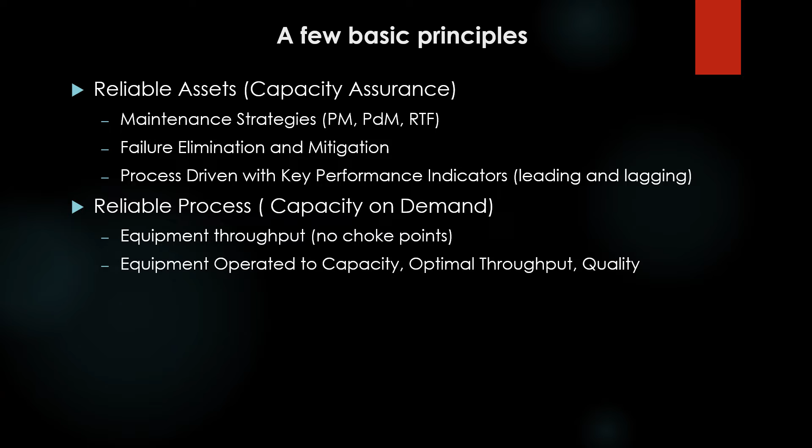The reliable process, capacity on demand, equipment throughput, no choke points, equipment operated to capacity, optimal throughput and quality. Process driven with key performance indicators again. We're leading and lagging. So reliable assets, reliable process. Reliable assets plus reliable process gives you certain results, okay? Meeting customer demand and profit.

The reliable assets, capacity assurance, capacity on demand. The goal, this goal will never be reached without a true partnership. We can't reach this goal by meeting capacity on demand and capacity assurance without having true partnership. Partnership with production, maintenance, and operations, storeroom, and so on.

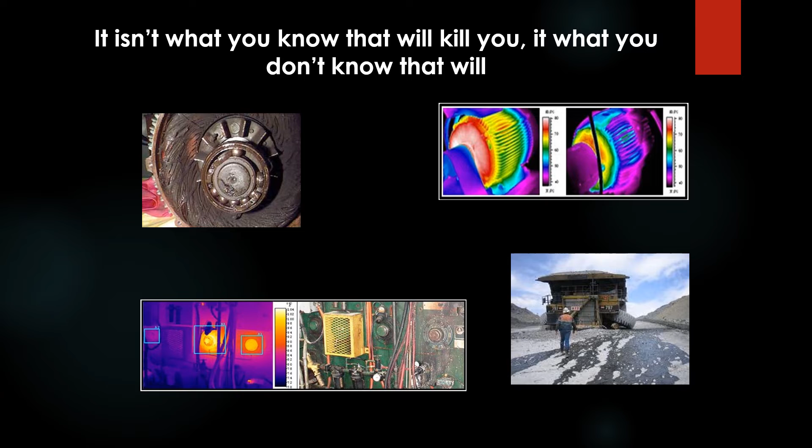I don't know if you've ever seen this before, but it says it isn't what you know that will kill you, it's what you don't know that will. And these are actual pictures that I took in organizations. And then your system is perfectly designed to give you the results you get. That's from Dr. Deming, smart guy.

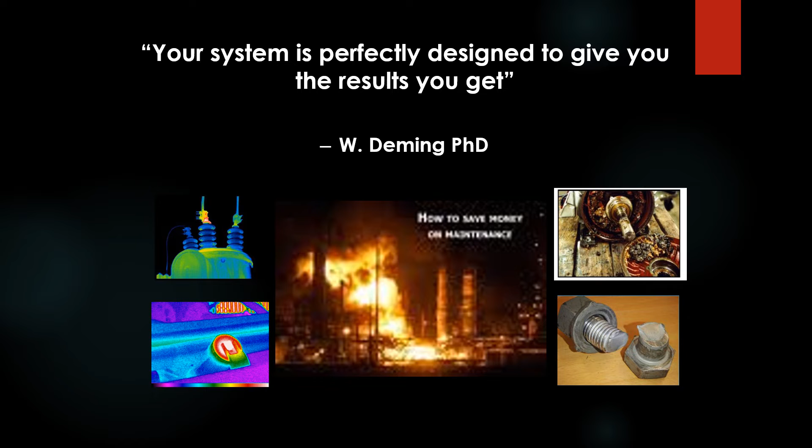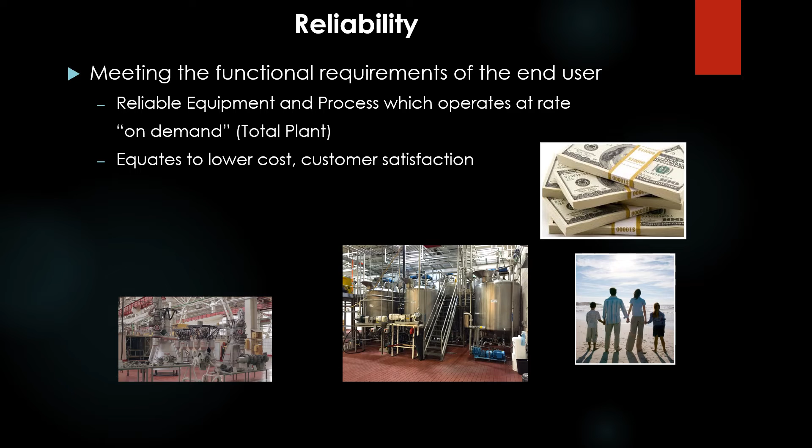Reliability, meeting the functional requirements of the end user. Reliable equipment and process which operates at rate on demand, total plant, equates to lower cost, customer satisfaction, on time deliveries and employee satisfaction. And then ownership satisfaction. And then increased output.

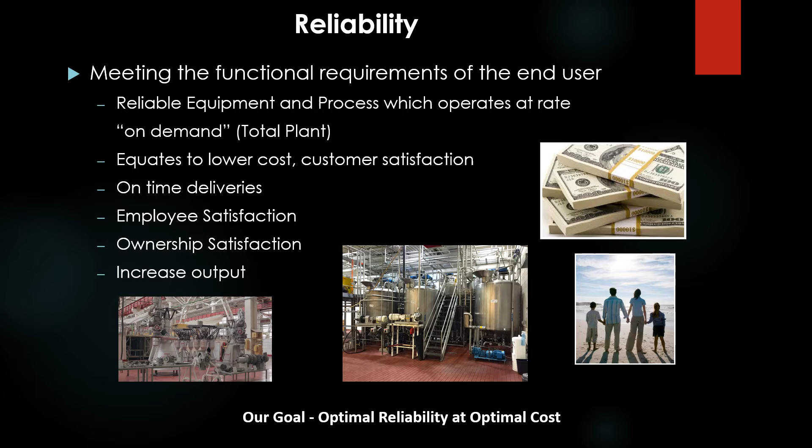Our goal is optimal reliability at optimal cost. So working together to achieve the same goal, no option. We're one team. Working together is a requirement, not an option. Sometimes in the heat of the day, we forget certain things.

Equipment or area running less than rate and quality. Maintenance and production have problems working together. Equipment failure, maintenance and production problems. Again, so what do we accept and not accept? Equipment not running to specifications, functional failure? I don't think so. Equipment breaking down when it wants to, total functional failure.

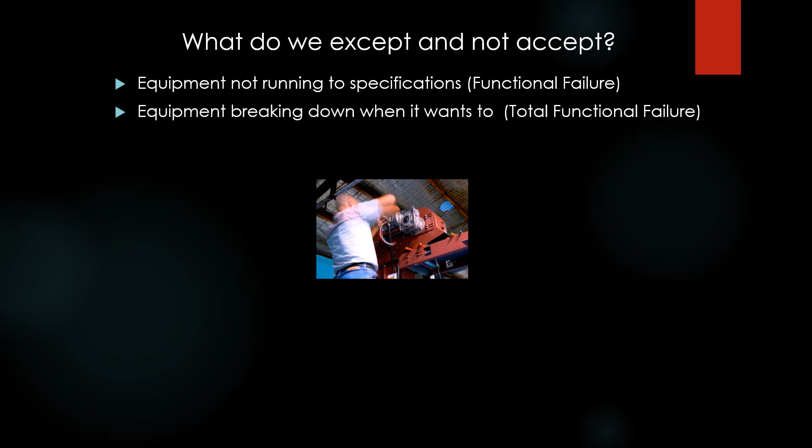I tell people either the equipment's in charge or the people are in charge. And how do you know? If the equipment breaks down when it wants to break down, then we have a problem that we need to get to the root cause of.

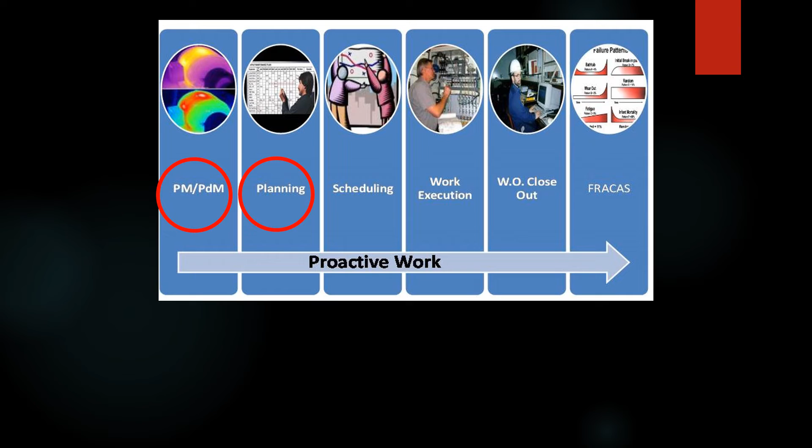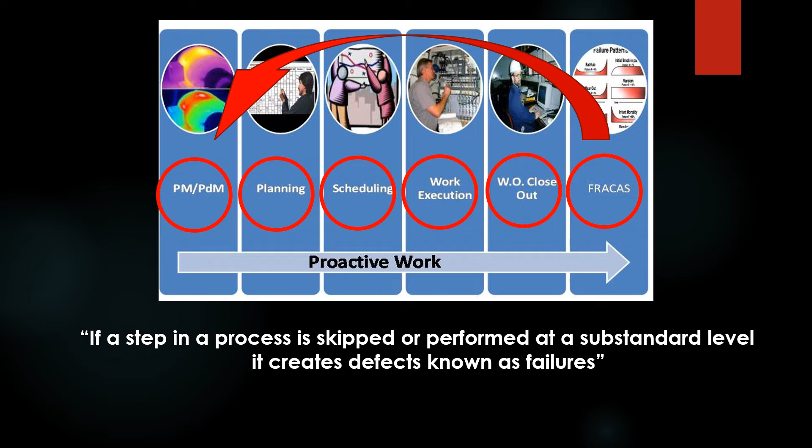So if we look at proactive maintenance, work starts with PM, PdM. Then from the findings is planning, scheduling, work execution, close out the work order, and then FRACAS, which is failure reporting, analysis, and corrective action system. And then this is a continuous improvement loop. This is proactive maintenance. So if a step in a process is skipped or performed at a substandard level, it creates defects known as failures.

So world-class standards: PM execution labor hours 15%, results from PM 15%, PdM execution 15%, PdM results 35%. In other words, what this is saying is we can identify more work early enough that we can plan it and schedule it with PdM, with predictive maintenance or condition monitoring. Total work planned, 90%. Reactive work, less than 2%.

Stockouts, this is when you go to the storeroom and it says there's a part in there and it's not in there. Less than 2%, which is world class. Schedule compliance by day, by week, 85 to 90%. And failure reporting, analysis, corrective action systems in place, eliminating failures by changing the maintenance strategy and equipment modification. Work orders are closed out with all codes identified.

Who closes out the work order? It's reviewed by the maintenance supervisor, but the maintenance planner is the one that actually closes the work order out. I've had a lot of companies tell me they don't agree with that. But when I talk to them about it, the planner is the only one sitting in their office calm, so they have the time to close it out accurately. As a former maintenance supervisor, I tell you what, at the end of the day, you don't have a lot of time to close work orders out.

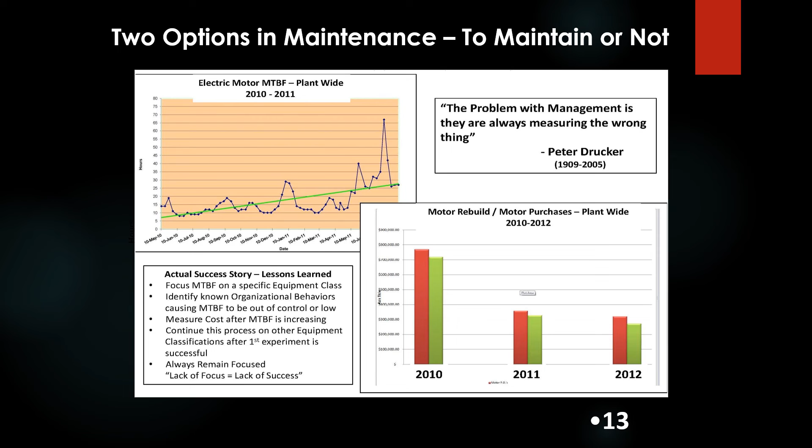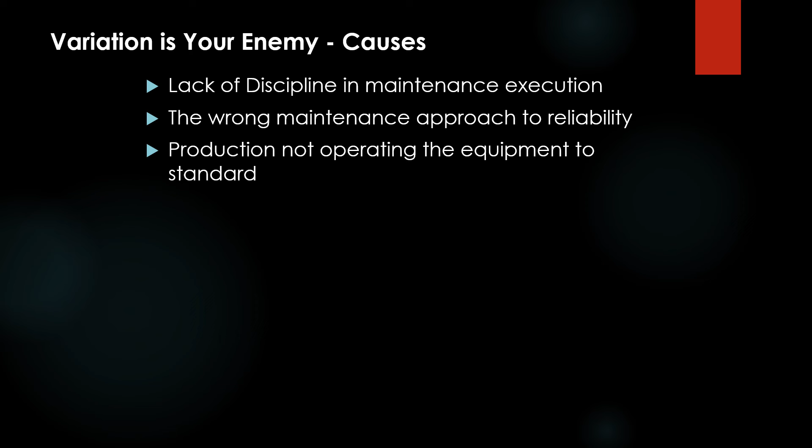So we have two options, okay? In maintenance, to maintain or not maintain. That's what we have the options of, okay? Variation's your enemy. Causes: lack of discipline in maintenance execution, the wrong maintenance approach to reliability, because run to failure is the dominant strategy, okay? Production not operating the equipment to standard. PM compliance is too wide.

In other words, what we're saying by PM compliance is too wide is that we've got a monthly PM, and then at the beginning of the month we say, hey, we don't have time to do the PM, push it off to the end of the month. So when the end of the month comes, we run out and get the PM done quickly. All right. Then the beginning of the next month, things aren't running quite well. So I'd say push off this PM to the end of the month. Okay, you see this kind of craziness that goes on.

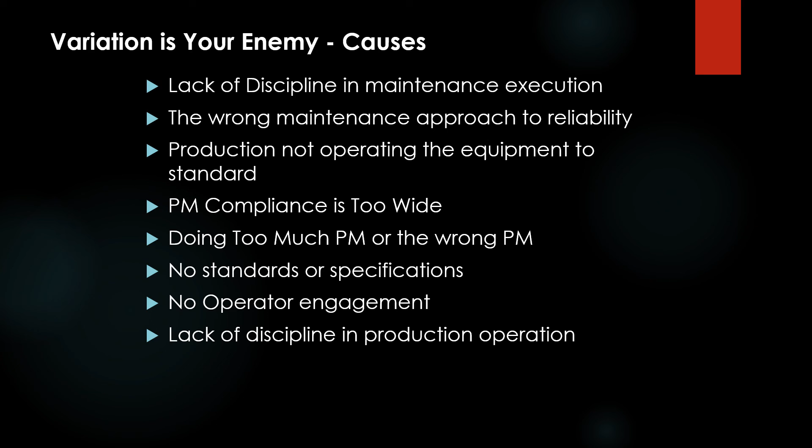Doing too much PM or the wrong PM. No standards and specifications. No operator engagement. Lack of discipline in production and operation. Typically, believe it or not, production has more losses than maintenance does, from a cost standpoint. The wrong things being measured. No doubt about it. So the world-class standards we talked about, we've got to know what the standard is. All right. Have to know what it is.

All right. That's the end of my short presentation.